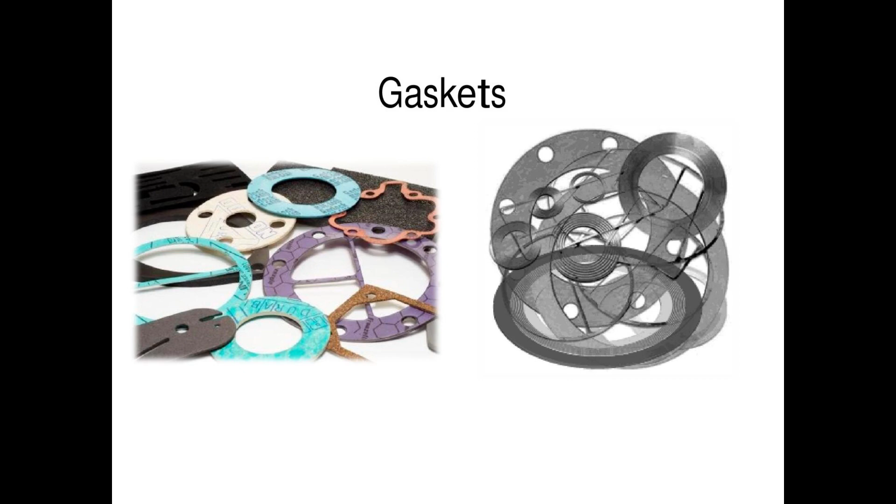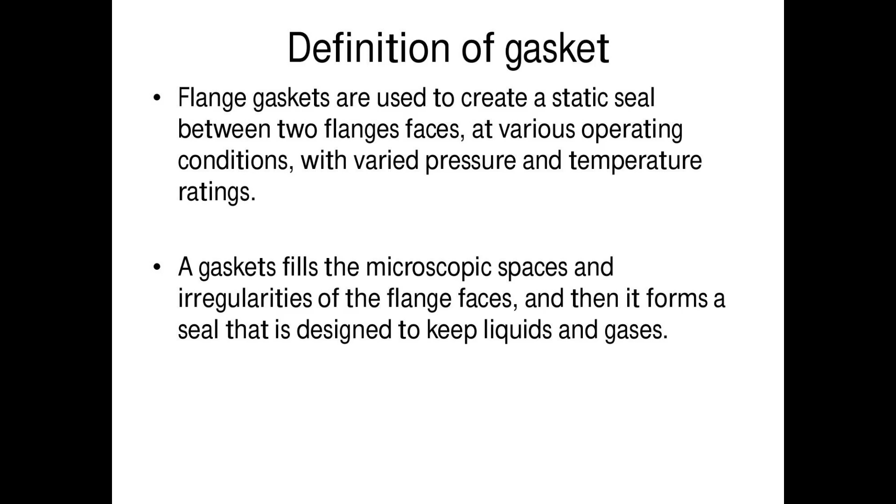First we will know about the definition of gasket. Flange gaskets are used to create a static seal between two flange faces, at various operating conditions, with varied pressure and temperature ratings. A gasket fills the microscopic spaces and irregularities of the flange faces, and forms a seal designed to keep liquids and gases contained.

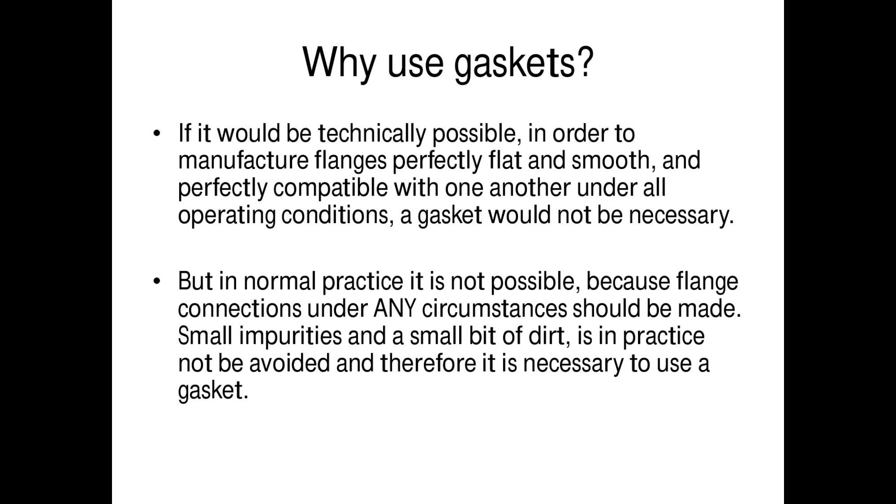Now, why use gaskets? If it would be technically possible to manufacture flanges perfectly flat and smooth, and perfectly compatible with one another under all operating conditions, a gasket would not be necessary. But in normal practice it is not possible, because flange connections under any circumstances should be made. Small impurities and a small bit of dirt cannot in practice be avoided, and therefore it is necessary to use a gasket.

And what are the types of gaskets used in piping system? Materials for gaskets can be divided into three main categories: Number 1, non-metallic gaskets. Number 2, semi-metallic gaskets. Number 3, metallic gaskets.

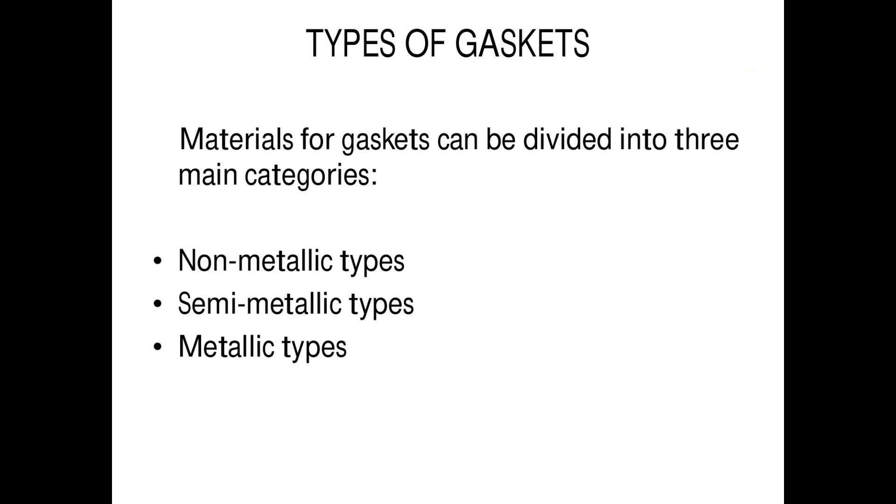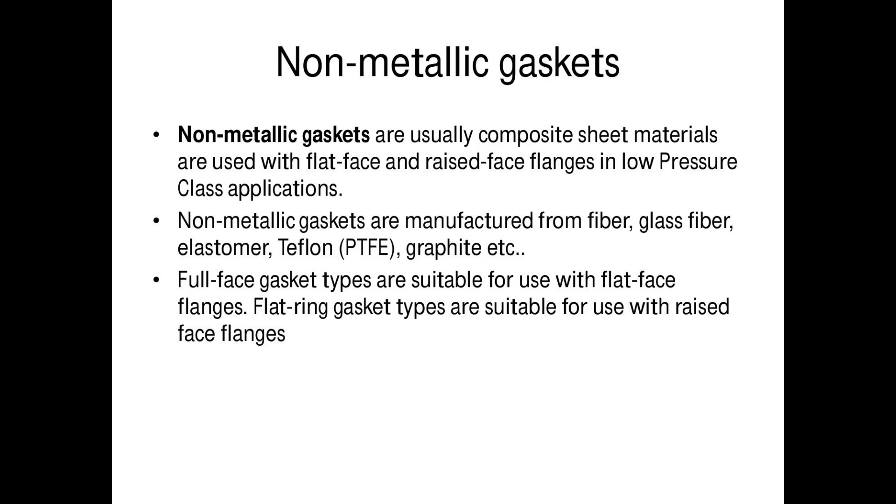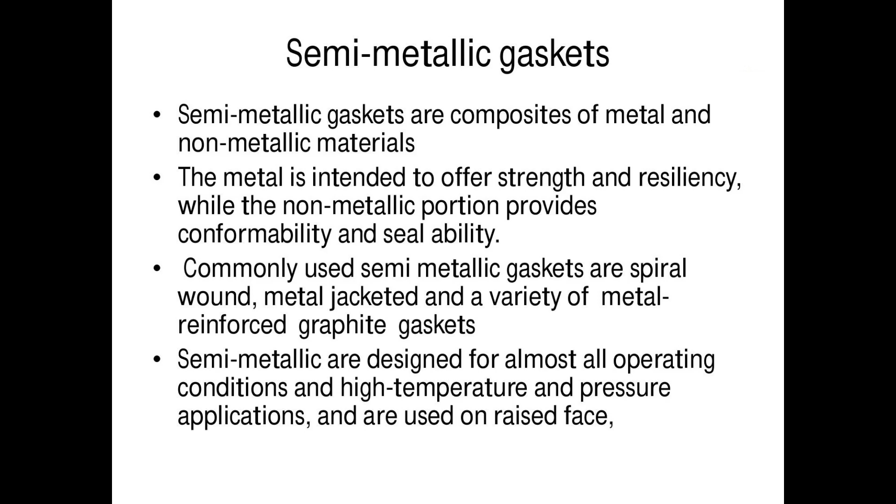They are always applied to special, accompanying flanges which ensure good, reliable sealing with the correct choice of profiles and material. Ring-type joint gaskets are designed to seal by initial line contact or wedging action between the mating flange and the gasket. By applying pressure on the seal interface through bolt force, the softer metal of the gasket flows into the micro-fine structure of the harder flange material, creating a very tight and efficient seal.

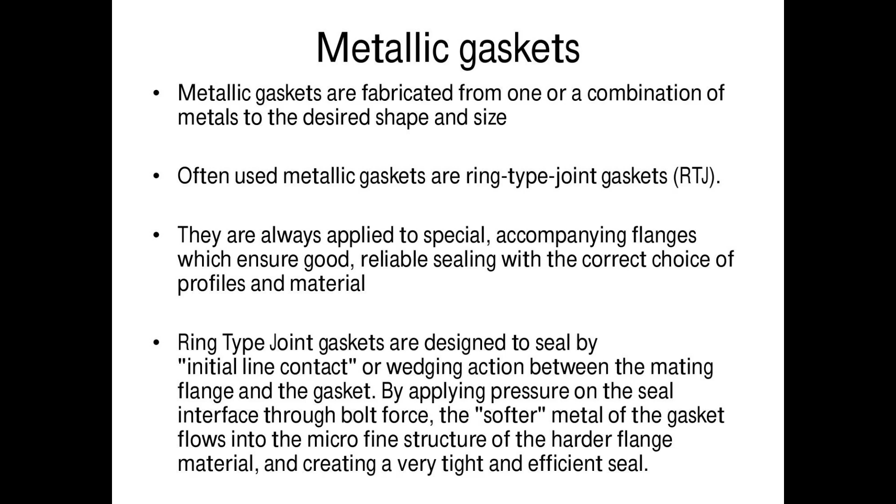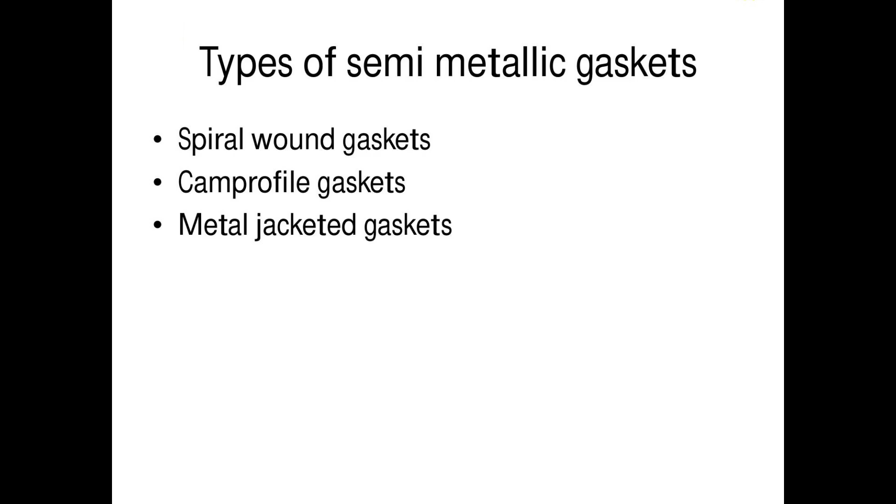The spiral wound gasket meets the most exacting conditions of both temperature and pressure in flanged joints and similar assemblies, and against every known corrosive and toxic media. The spiral wound gasket depends upon the mechanical characteristics of a formed metal spiral strip, rather than the compressive virtues of more traditional gasket materials.

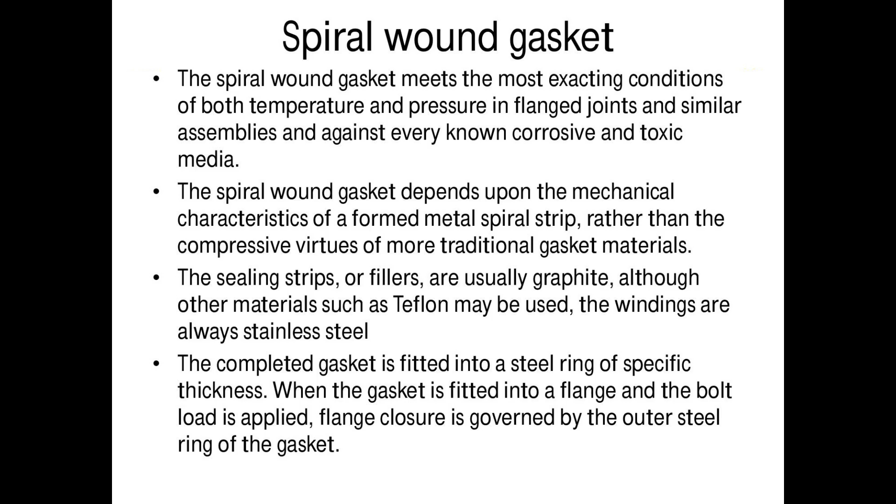The sealing strips, or fillers, are usually graphite, although other materials such as Teflon may be used. The windings are always stainless steel. The completed gasket is fitted into a steel ring of specific thickness. When the gasket is fitted into a flange and the bolt load is applied, flange closure is governed by the outer steel ring of the gasket.

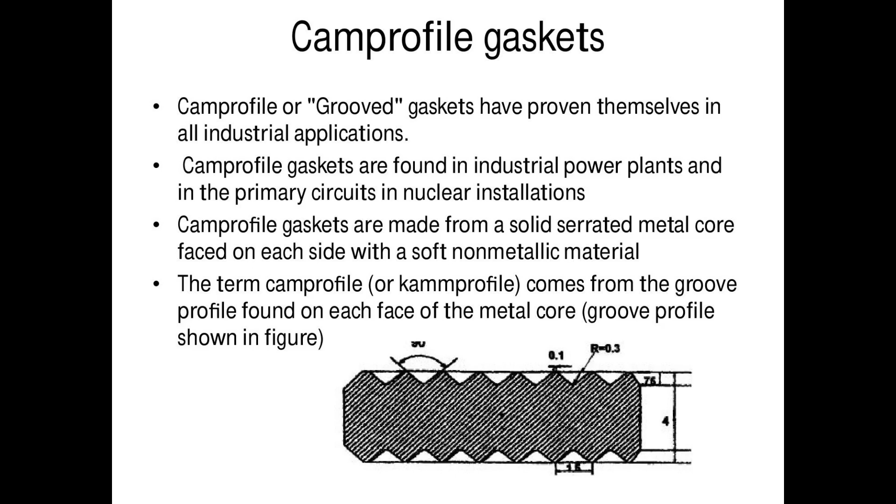Camprofile gaskets are made from a solid serrated metal core faced on each side with a soft non-metallic material. The term camprofile comes from the groove profile found on each face of the metal core, as shown in the figure.

Camprofile gaskets consist of a metal core, generally stainless steel, with concentric grooves on either side filled with sealing materials. The sealing layers, depending on the service duty, can be graphite, Teflon, or metal, e.g. aluminium or silver. Camprofiles can be used without sealing layers to provide an excellent seal, but there is a risk of flange surface damage.

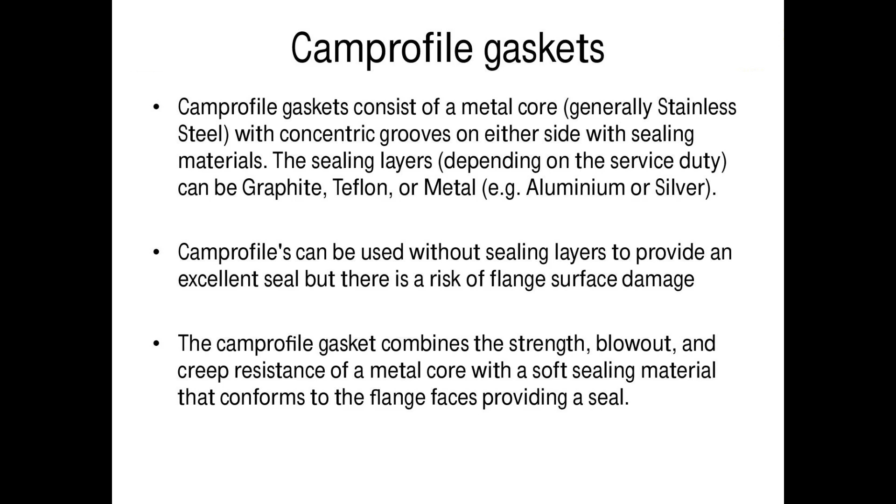The camprofile gasket combines the strength, blowout, and creep resistance of a metal core with a soft sealing material that conforms to the flange faces, providing a seal.